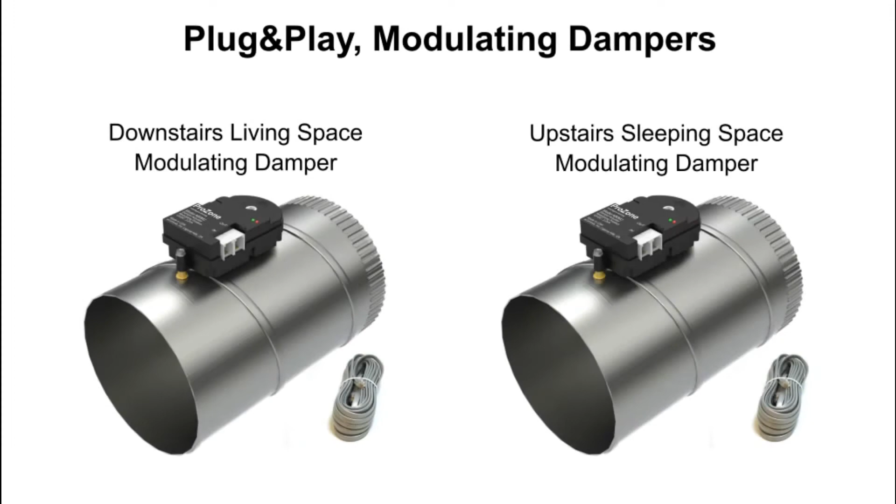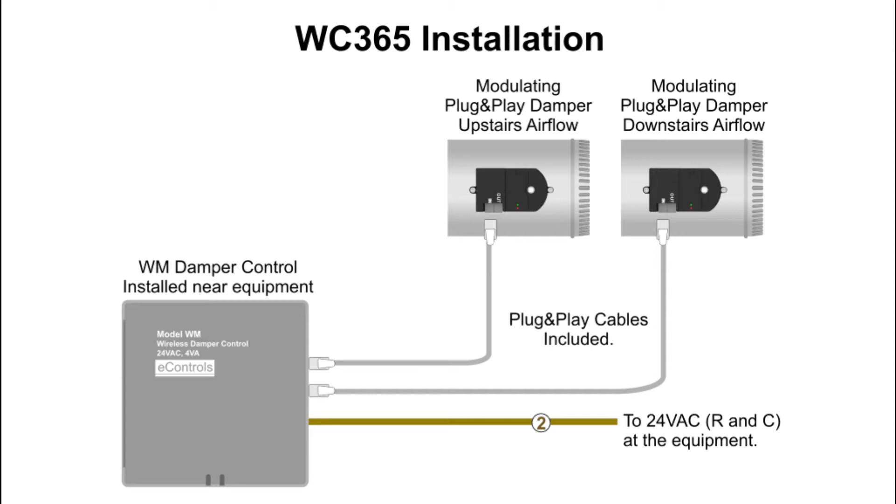The plug-and-play dampers are modulating, so airflow can be adjusted to the desired level compared to a zoning damper that just opens and closes. The dampers connect to the WM receiving module using the plug-and-play cables provided, and the low-power actuators use only 2 VA of power, which allows the WM receiving module to operate using the equipment 24 VAC. If needed, up to 4 dampers can be connected to define a zone.

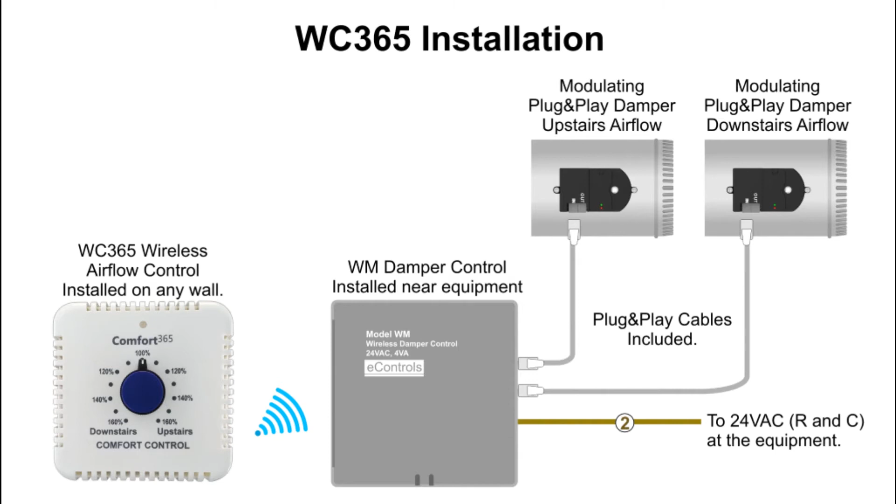The WC365 wireless airflow wall control requires no wiring within the home, works independently of the thermostat, and is already pre-linked to the WM receiving module. The WC365 eliminates installing a bypass duct and barometric bypass damper, which is difficult and time-consuming. Bypass is eliminated because the dampers never fully close and the airflow through the equipment remains unchanged. Installation time is significantly reduced.

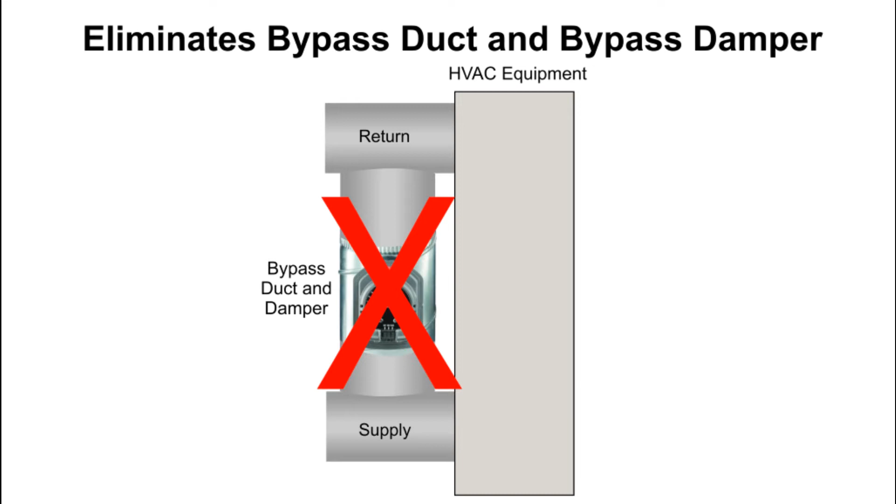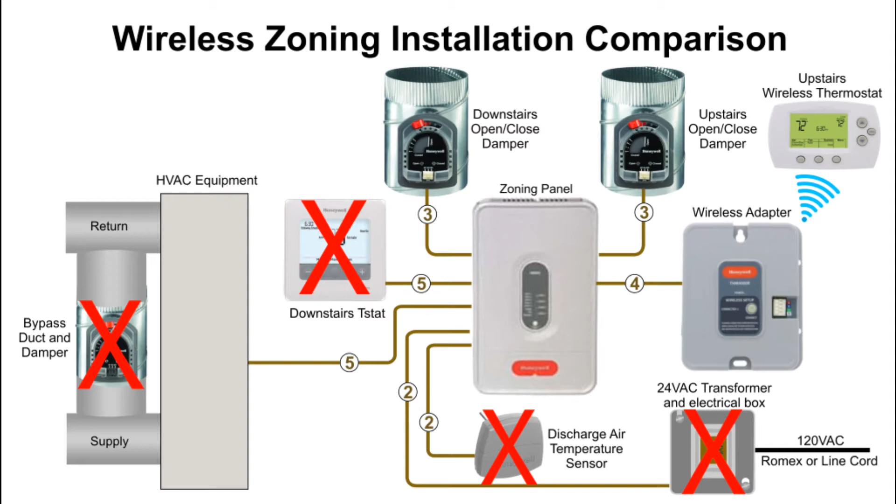The WC365 also eliminates the discharge air temperature sensor, zoning panel, transformer, and thermostats. And if wireless zoning is used, don't forget the added cost of the more expensive panel, wireless adapter, and wireless thermostat. The WC365 eliminates these as well. Just 2 wires and 2 cables to plug in compared to 24 wires in a zoning installation.

The WC365 solves the comfort problem by simply distributing more airflow to the space that needs it. When the upstairs needs more airflow, typically in cooling, the knob is turned clockwise. The upstairs damper remains fully open, while the downstairs damper partially closes, forcing more airflow upstairs.

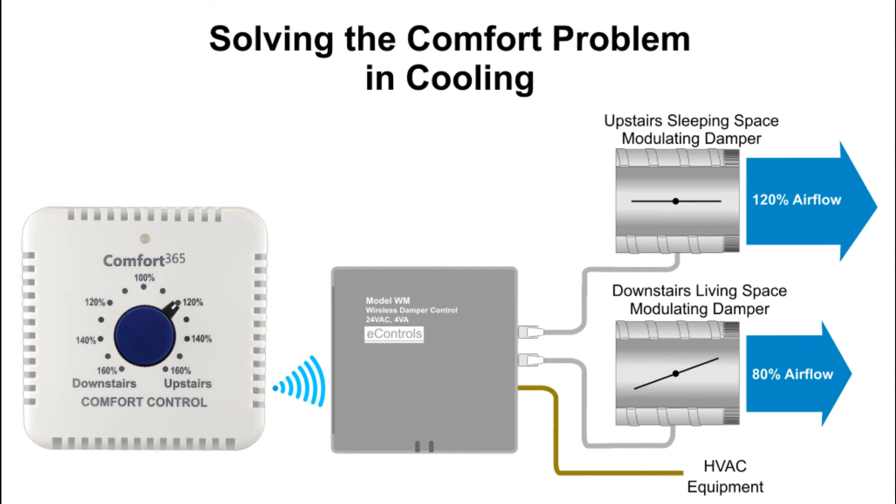When the downstairs needs more airflow, typically in heating, the knob is turned counterclockwise. The downstairs damper remains fully open, while the upstairs damper partially closes, forcing more airflow downstairs. The WC365 adjusts the airflow to find the right distribution to match the demand for a comfortable home in every season. The simple operation requires no homeowner training or technical support.

The WC365 is less than half the cost of zoning, much easier to install, provides a comfortable home in every season, and saves energy, making the WC365 a powerful solution for contractors and homeowners.